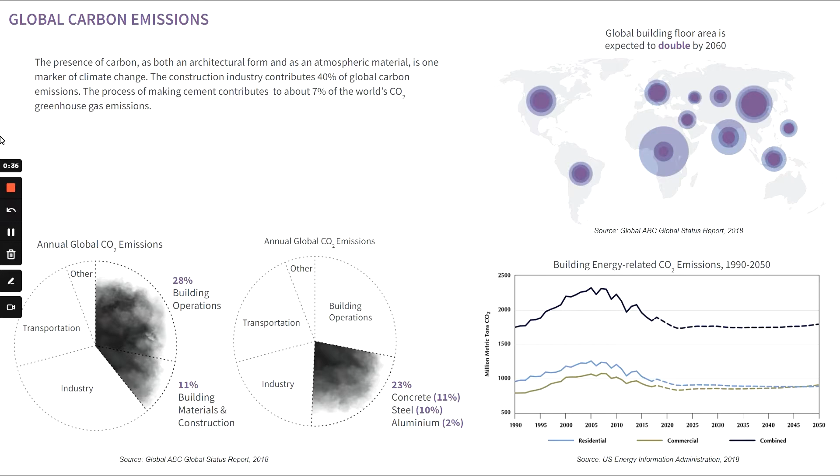carbon's role to produce sustainable concrete. The pie charts illustrate the current contribution of various industries to CO2 emissions. On a global scale, the floor area is expected to double by 2060, but we can reduce emissions if necessary steps are taken. Hence, we feel that the architectural envelope needs to be significantly expanded to confront the presence of carbon.

The timeline is a testimony of carbon being present in high quantities within the terrestrial masses. The atmosphere is not only a great carbon retainer, and when buildings are demolished, carbon gushes into the atmosphere in an enormous amount. We can reduce carbon footprint by capturing carbon emissions to make recycled materials, which could help curb this immense pumping of tons of carbon into the atmosphere.

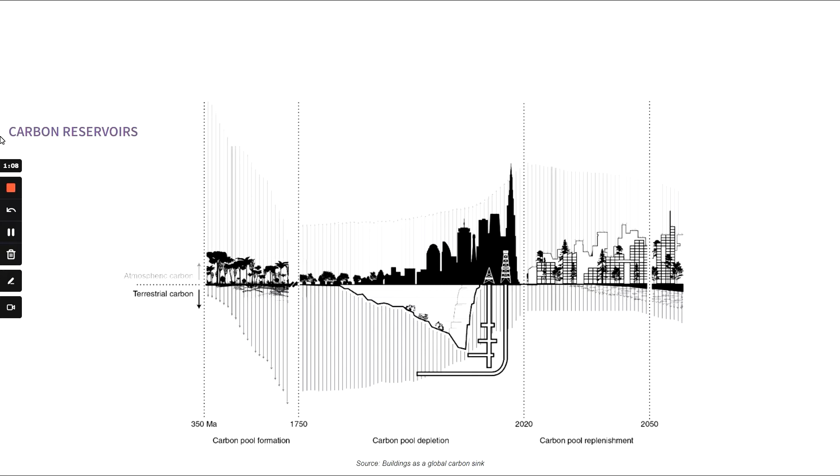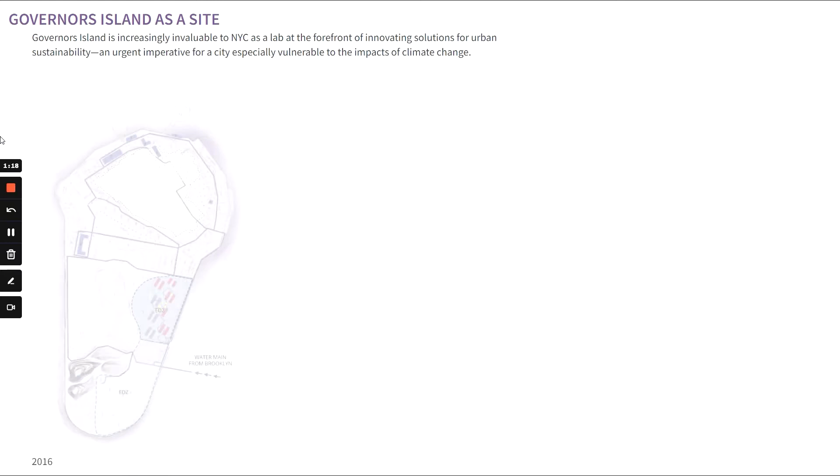Governors Island is a 172-acre island in the New York harbor with no living communities. A beacon for climate change, the island allows us to introduce carbon sequestration methods, and as a result, we studied the existing materiality of the barracks and how we could use it for carbon preservation.

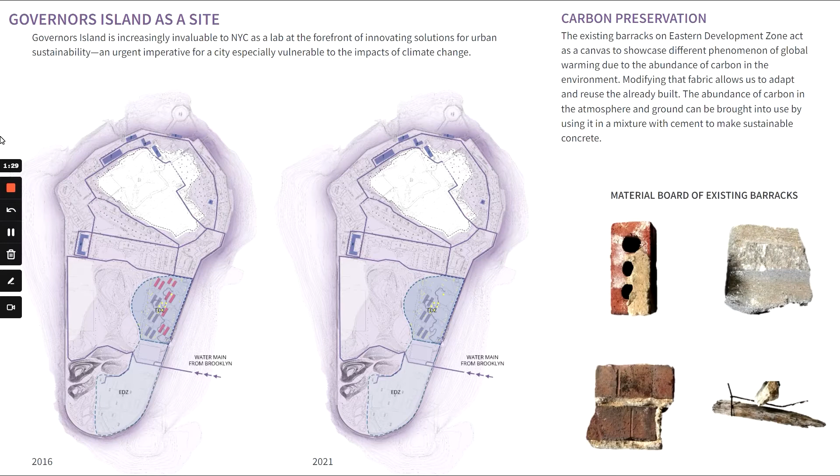We visualize the project outcome in 3 steps. First, where we enable the adaptive reuse of the barracks. Secondly, a structure designed to accommodate a technology that extracts atmospheric carbon. Third, introduction of a trajectory as an immersive experience and a knowledge path for the user.

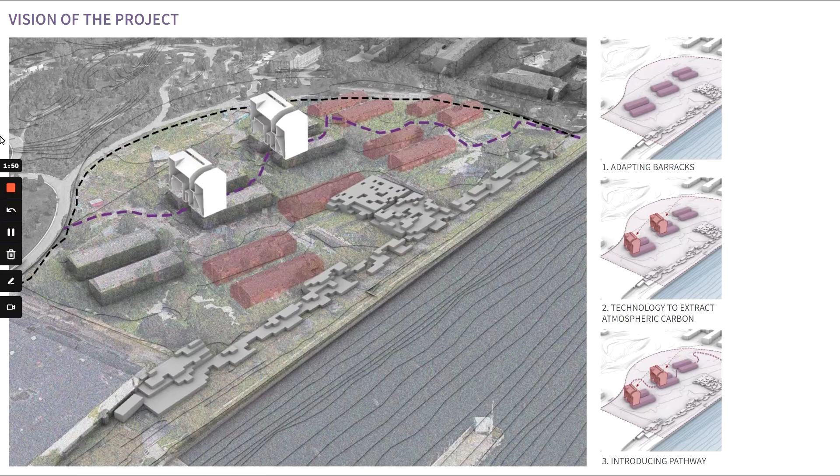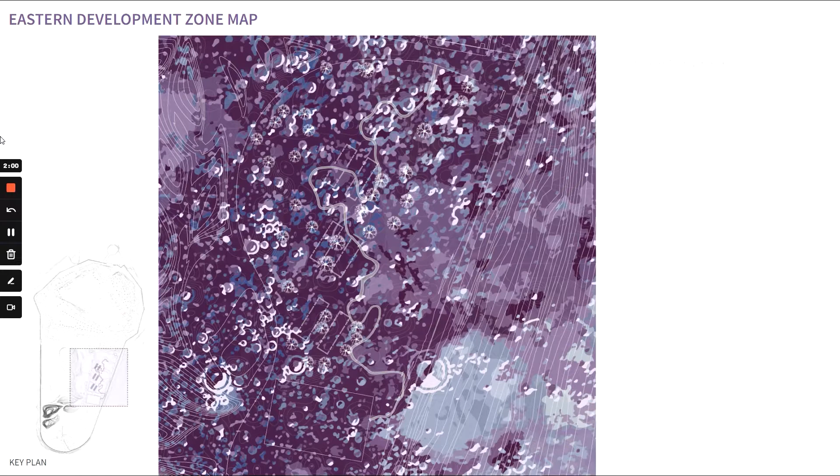Further going into the Eastern Development Zone map, details illustrate the 3 main components of our design: the barracks, technology to filter atmospheric carbon and make CarbonCure concrete, and the trajectory.

The following section shows our study of the atmospheric carbon levels over the last few years and the use of the water from the water table to filter carbon from the atmosphere.

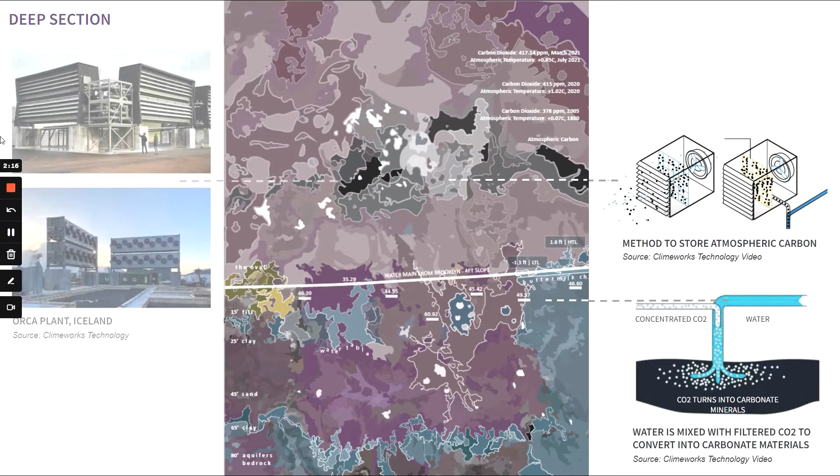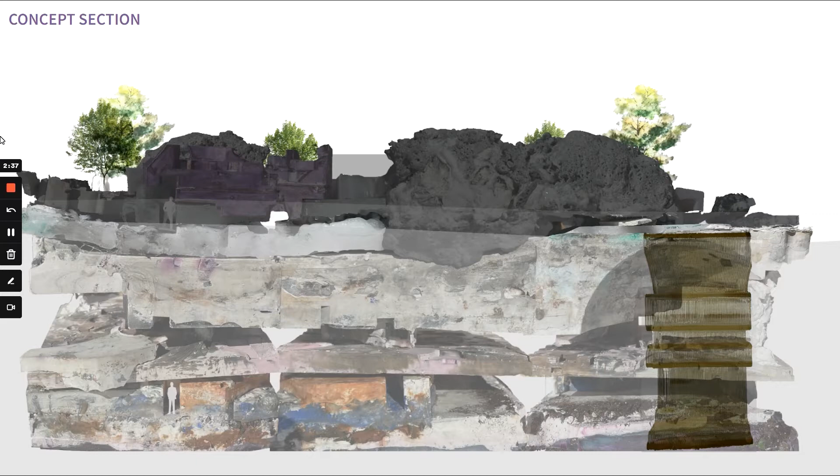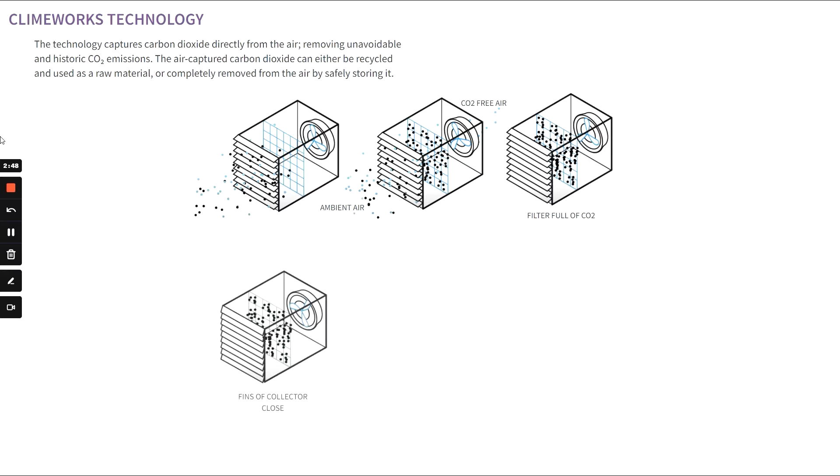Climeworks technology captures the air which is passed through a selective filter material. Once the filter material is full of CO2, the collector closes and is heated to 100 degrees Celsius and captured CO2 is mixed with water and pumped into the ground.

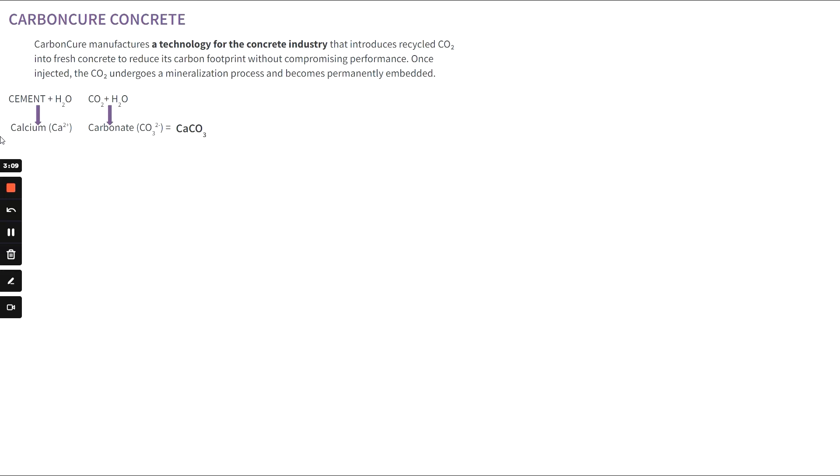Our proposal is to use the filtered carbon dioxide into the debris from demolished sites in New York City or into fresh concrete to reduce the carbon footprint without compromising performance. Once injected, the carbon dioxide undergoes a mineralization process and becomes permanently embedded.

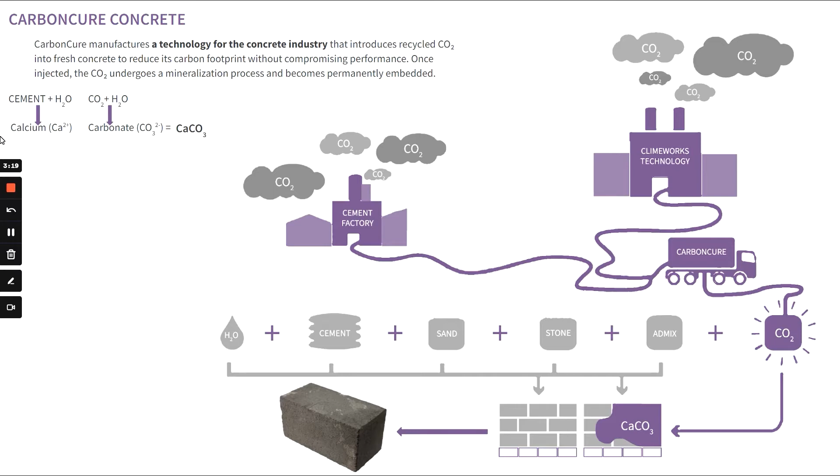This mixture will then be used to make concrete blocks that fabricate the emerging landscape. The calculation indicates the amount of filtration by each turbine and the quantity that will be used to make sustainable concrete blocks. Annually, the project generates carbon equivalent to build 5,300 sustainable concrete blocks.

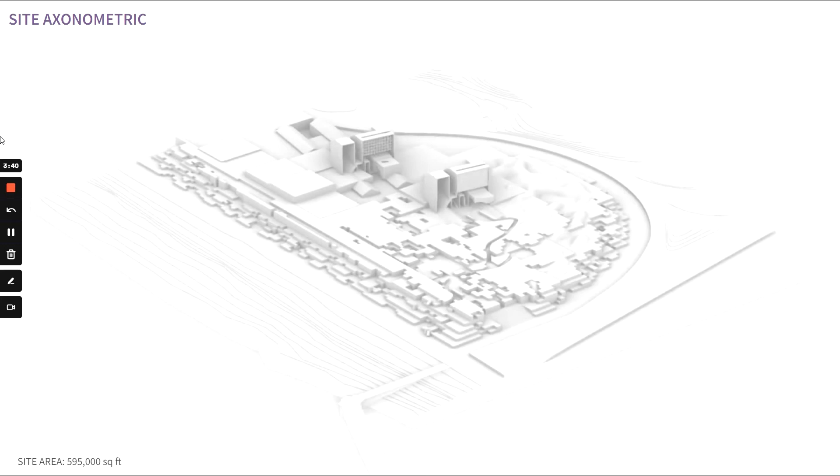The axonometric view indicates the division of the site into 2 phases. As of now, we developed phase 1. The idea is to redirect the coastal road on the edge of the Eastern Development Zone around the site and convert the existing road into a green shoreline.

The structure design comprises of the turbines that absorb the polluted air flowing from Manhattan and filter it. Yankee Pier acts as an unloading area for the concrete debris that will be brought to Governors Island to recycle and mix with filtered CO2. The existing barracks accommodate the services to run the turbines to generate sustainable concrete.

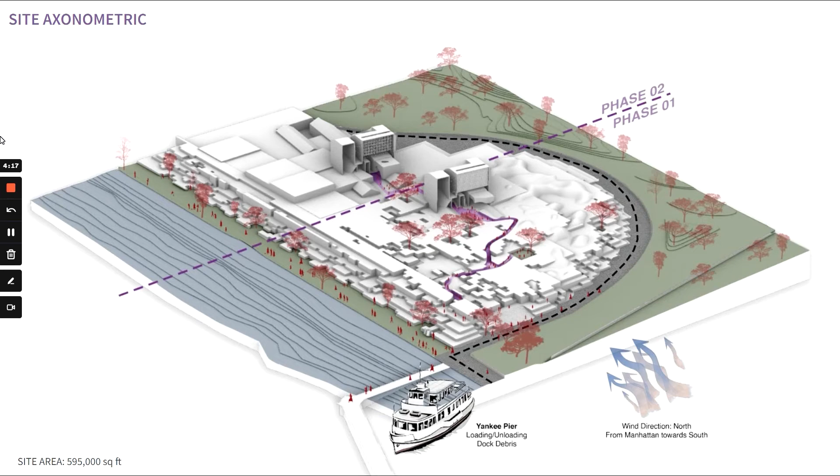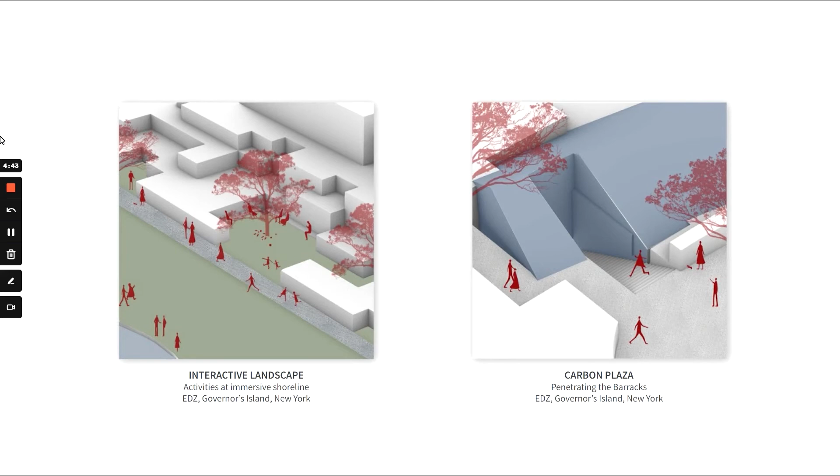During the course of the trajectory, the blocks are placed around the trees, which in turn act as an interactive space for the visitor. These spaces are green patches to break away from the monotony of the carbon landscape. Next is a view of one of the topmost concrete blocks.

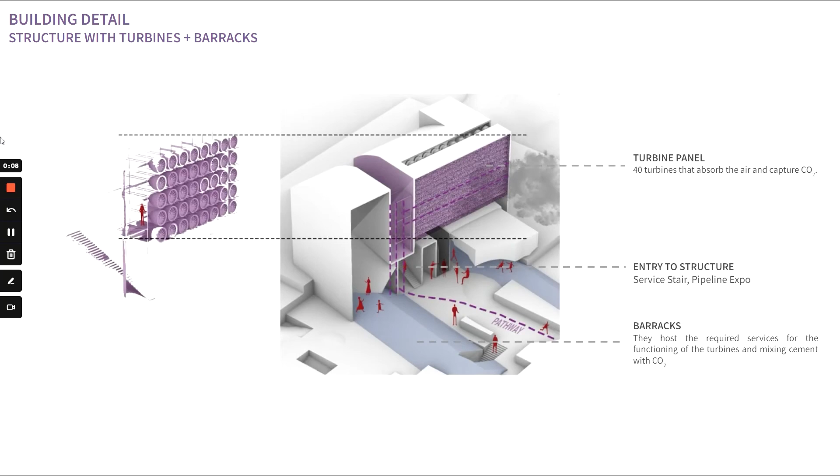Zooming in, the built mass hosts the turbines and other sequestration units on the upper level, and there is a trajectory that passes through the lower level. It is a choreographed experience of a distinct kind where the audience witnesses the crumbled black dark pockets that showcase the unwelcoming scenario on the planet if atmospheric carbon keeps increasing.

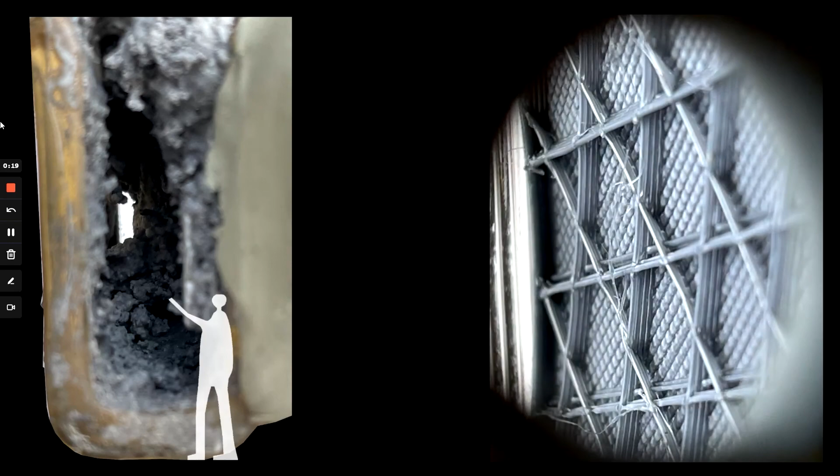These models are a testimony to the fact that sequestration can speed up and we can build a brighter future for ourselves.

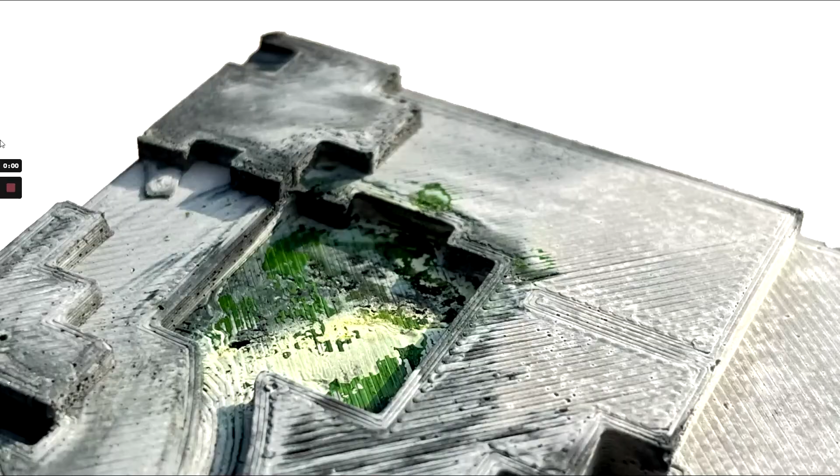We would like to dig deep into the possibilities of carbon-infused materials and its capabilities, thus building with carbon. Thank you.